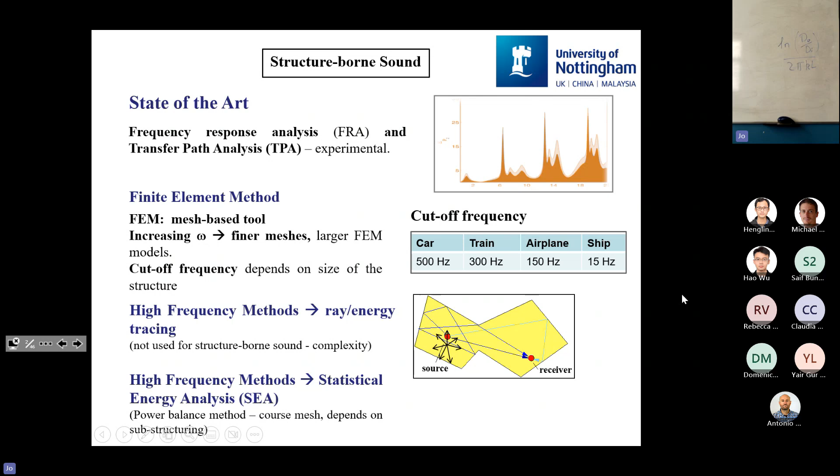So we're talking about structural vibrations, structural excitations, NVH, essentially. So not so much acoustics in this talk. I know, of course, this is the mecca of acoustics, but it's obviously related. You all know that one way of looking at structures experimentally, you essentially excite them. You do frequency response analysis. You get certain peaks giving you modes. You may do something like transfer path analysis, and then that gives you a way of looking at the structure.

From the modeling side, the standard tool is, of course, the finite element method when you look at structures. So you have meshes, but I'm sure you're aware of that as well. With frequency, essentially, you have to go to finer meshes, and at some point, you have a limitation that the meshes just become too fine, and that's actually surprisingly low. I mean, I guess maybe 500 hertz for a car is this critical frequency where the models are just becoming too big. Okay, I guess we'll push that higher now.

But as the structure itself increases, this critical frequency decreases. So if you're looking at ships, and I'm thinking of these big tank ships, then this can be as low as 15 hertz.

If you then go to high frequency methods, high frequency meaning above that cutoff frequency for finite elements, the next best method is kind of ray or energy tracing. That is something people do in acoustics a lot, not so much on structures, because think about how you would follow a ray on the structure, which can be quite complicated. Often it's 2D. Sometimes, of course, you have to treat it as 3D.

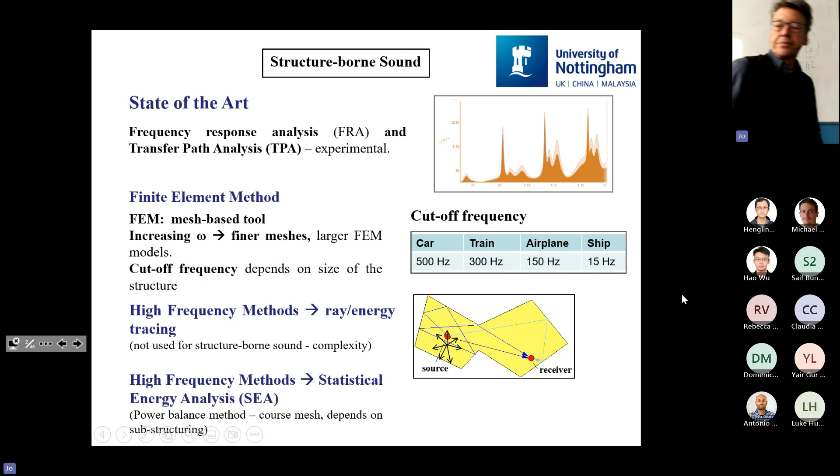Yeah, so here a few words about SEA. As I said, that's kind of the most used method. Most big software companies have an SEA solver in their toolbox. So what you're doing is you may have a structure like that. Here's a car, and then you take the substructure. The windshield could be one substructure, but it's the whole windshield.

The roof could be one. The frame down there, and then maybe various beams. So the substructures are relatively small compared with the degrees of freedom you get from a finite element mesh. So that's normally a couple of hundreds, maybe thousands, but not more than that.

The idea of what you do is essentially you treat all these substructures as a reservoir where this energy is stored and sloshing around, and then there are various exits or entrances where this energy can then flow out, and it only makes sense to talk about these substructures if you assume that you get some sort of equilibrium distribution in each substructure, and then you have some coupling.

So the time it takes to equilibrate in each subsystem is fairly short compared with the time it takes to move on. So then you can do this kind of power balance method, and then essentially you lose all information about the actual structure, about the geometry. The only thing you need is the volume or the area of that, and you get very simple graph-like structures where you have various coefficients. Beta is this coupling loss factor. It becomes something like that.

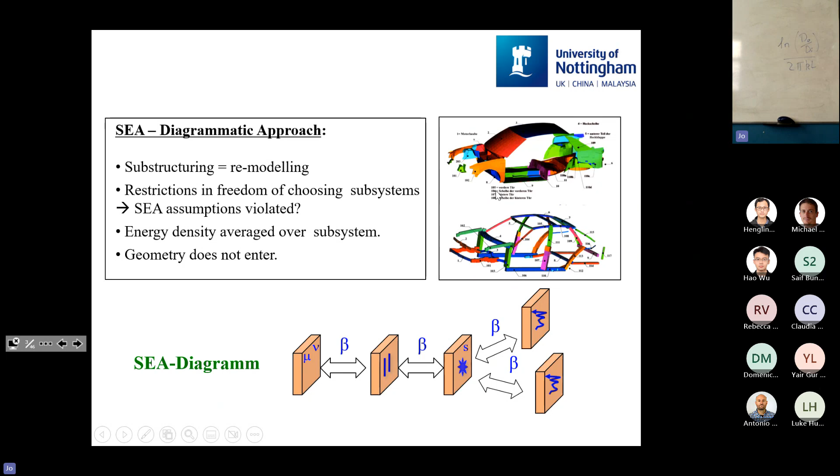Yes. So essentially, here this bottom part, that is then one big substructure which stretches over the whole structure. You get then one energy value for that, and that doesn't really make sense. So anyway, this is used, and it can be used, and there are justifications when it can be used. They're quite nice. If you think of this in terms of rays, which I will do in a minute, what you need is some sort of ray chaos in each of these subsystems, and you can justify the SEA assumptions quite nicely. Which is normally not done. It's kind of trial and error.

Right, so what I want to do is go to ray tracing, and we will try to do ray tracing on structures. Let's just start with the usual way. You have a source here, and you have a receiver point. You have the rays going from the source to the receiver. As a semi-classical physicist, I would write this down in terms of the Green's function, which is essentially the energy or the rays going from this source point to the point R.

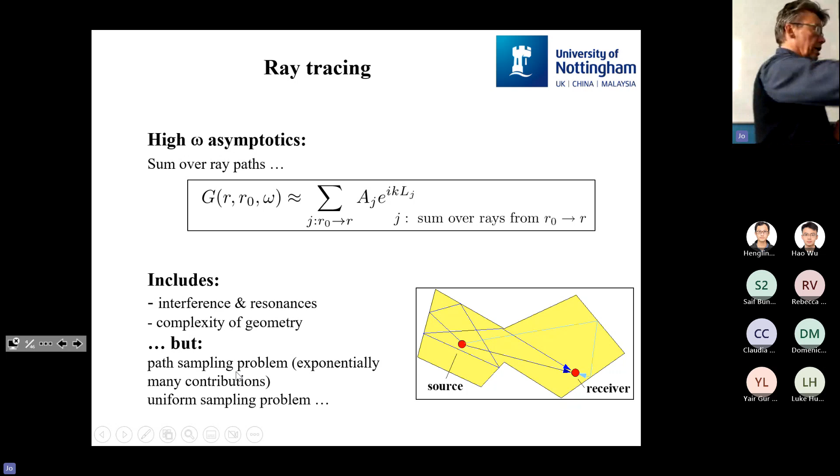Well, again, of course, you have waves traveling in the structure. It's the elastic waves, but the structure itself is much more complex. So, what we do is essentially look at the energy density of our structure. So here we are back to this picture where we have rays going from R0 to R. There can be many of these rays. They all have phases attached to them.

But if you go to the square, you get kind of a double sum over these terms, which you had in this Green's function earlier. And then you can argue that the dominant term in this is when j equals j prime. And then you have as a dominant term essentially something which you can interpret as the energy density. And then, in addition, you have interference terms. Sometimes this is referred to as the diagonal approximation, which is the dominant term.

But here, of course, you have not lost all phase information. So the phase information is in these interference terms. But you could argue that this is sort of an average value, and then you have some fluctuation on top, which are given by these interference terms. So we will try to only model that part here, and forget about the interference.

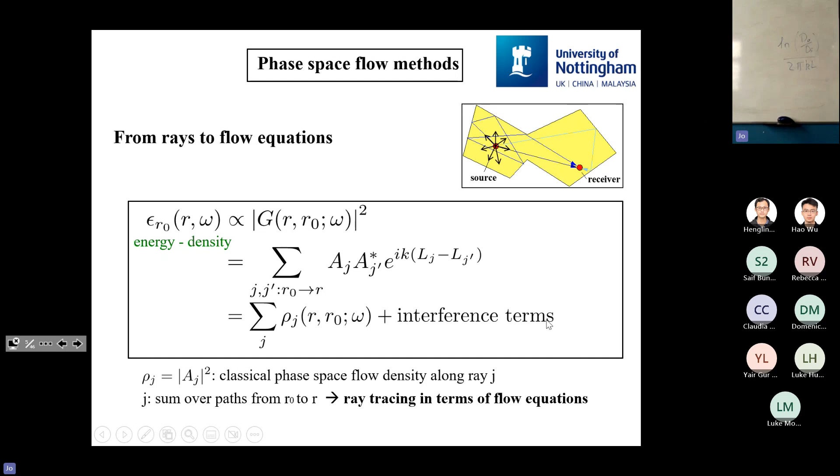By doing so, of course, we lose all information about resonances. We are back to a classical picture of energy flowing in that structure. Yeah? So there is no interference, no diffraction, nothing of that. That's all gone at that point of the approximation. So in the following, I will now look at this energy density, and it may depend on two parameters. R0 would be kind of a source point, and R would be the energy density at some other point, which you get from this kind of ray tracing picture.

And I will argue that what we're actually doing is looking at something else. We're looking at a phase-space density. So instead of looking at this energy density, I'm looking at a quantity which is more involved than that. If I want to classify the rays, I need some directionality. I could say, okay, I take my source and I'm looking at all rays going out from that source and being reflected, and I describe them in terms of a phase-space density.

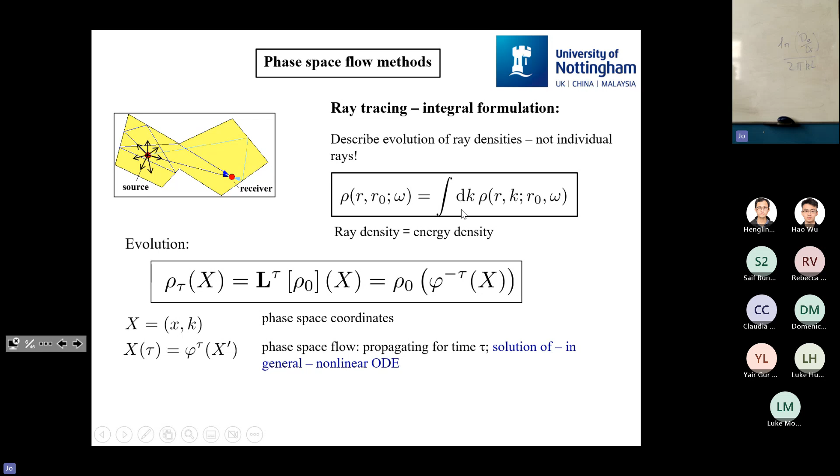Phase-space density meaning the density of rays at a given point going in a certain direction. Yeah? So that's what I call phase space here. I take the directionality as a separate variable, which I'm keeping track of. If you then integrate over this directionality, k, which is reminiscent of the wave number vector and which I call my direction or momentum variable, if I integrate over all directions at a given point, then I'm back to my energy density.

Now, if I have that, I've doubled my variables. I'm looking not at the energy density itself, but at this quantity which also knows about directionality. But the good thing is I can describe this in terms of a linear operator, sometimes called the Liouville flow or the Frobenius-Perron operator, acting on these densities, and that can be written down in a linear form. Essentially, it is kind of a pullback.

So you have your density initially. If you want your density at a later stage, this rho_tau(X) is in my phase-space variable, twice as many variables. So it has the position, it has a momentum. And if I want the density at some later time, I'm essentially pulling back the flow. So here's phi tau, that's my flow. That's telling me that for the ray starting at a given point, going in a certain direction, phi tau tells me where it is a time tau later.

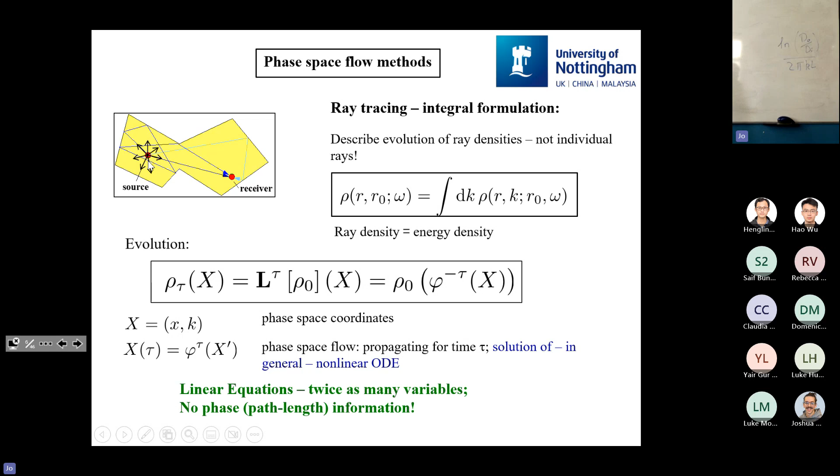So the idea is, I'm doing that slightly differently—I'm actually describing that as a map. And then we very easily come to meshes. Think of this being our system here, but later on it will be a mesh cell of a much larger mesh. Think about, you have this source in the middle.

So what you can do is essentially see how this energy goes to the boundary, and once you know what the energy density is on the boundary, you can map back from boundary to boundary, and you get a boundary map. That will also describe your equilibrium distribution, but the nice thing is you've thrown out time, and you now have a geometric description of that flow in terms of maps from boundary to boundary.

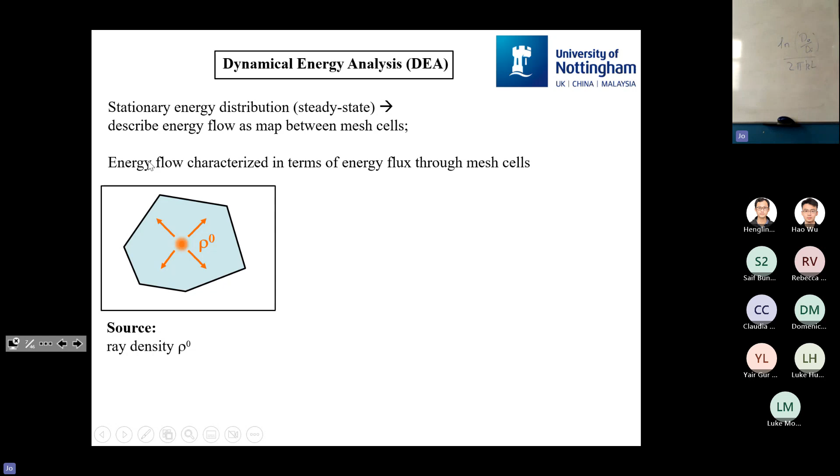So the idea is to describe this internal source as—you could think of this as kind of a light source—and you replace that by what's reflected here by the mirrors at the boundaries. That gives the same thing after you've excluded the direct path.

And then once I have this source on the boundary, what I'm doing now is just mapping my source on the boundary back to the other boundaries. I describe this as a boundary map. So the boundary map is now, instead of this continuous flow, I'm just looking at something which maps my coordinates S and PS, being the direction tangential to the boundary.

I map that to where it sort of ends up after one reflection. And now I can use that map to map my phase-space density, but now it's a phase-space density in a kind of surface section plot, or some reduced plot that got rid of time and also got rid of one of the variables. So that's sort of what we're doing.

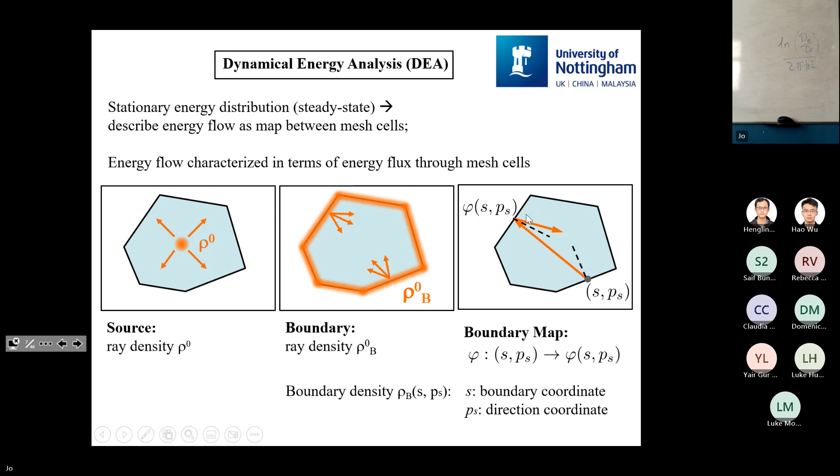Now, instead of having only one of these regions, I can add another cell here and another cell. Again, I start with boundary density, and from then on, if it's just going through, I can map that to the boundary of the next cell, the boundary of the next cell, and so on. So that's now an implementation—that's all I want to say about the method.

That's now an implementation. I'm not sure whether you can see that—there's a mesh in this purple region, and there's a source coming from one of the boundaries. It's quite a directed source. I can choose my source wherever—think of that as an excitation, like somebody banged on the structure, and this thing is now propagating.

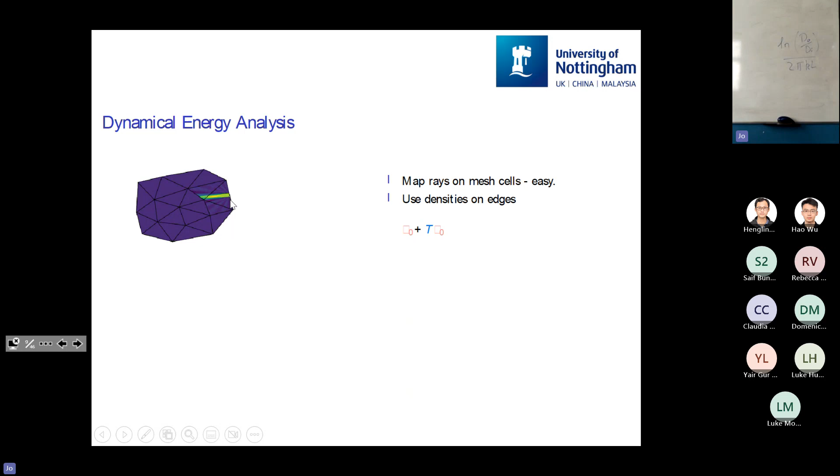Oh right, that happens when you copy. So this red square is actually rho—rho naught, standing for my initial excitation or initial energy density. T is now my operator, which maps these density functions from one boundary to the next. Now you see what's happening here—you're propagating this slowly through the structure. You have some numerical diffusion here. Oops, sorry.

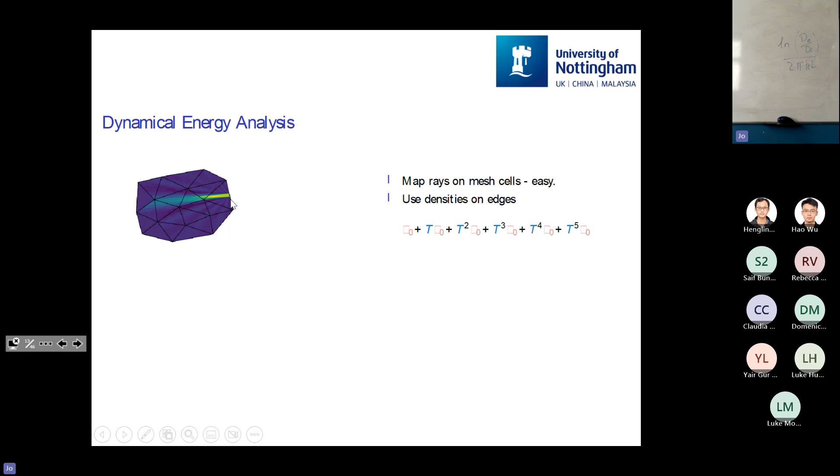When we actually construct a map, we only have a finite resolution. You get infinite resolution only if you have an infinitely large map, because it's an operator. But for finite resolution, you have a certain dispersion here.

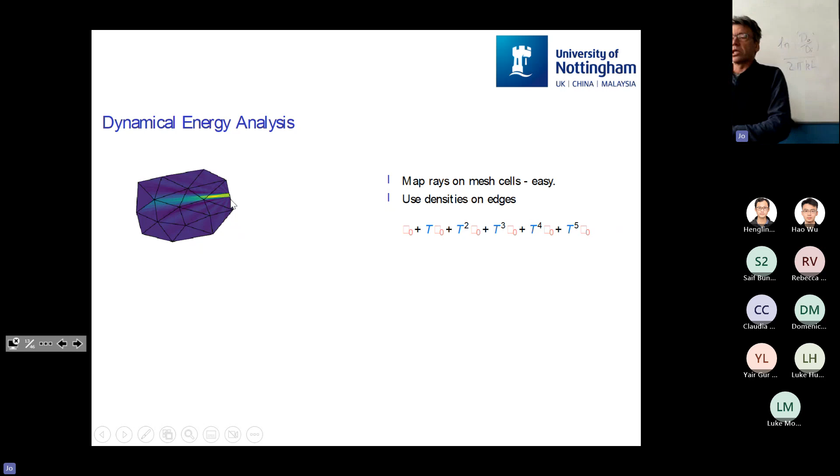T is a matrix, it's a linear operator, and of course, in any approximation we choose, it's just a matrix. So here's the kind of equation we solve.

So think of a rectangle thing rho. If you now want to include all the reflections, you just propagate this further and further, and eventually you get reflections in and so on. If you now take the number of iterations of your operator acting on your initial density to infinity, you get some equation like that. So you have a simple equation that the equilibrium density you're looking for is essentially given by 1 minus T inverse your initial density. So we can do that on a mesh.

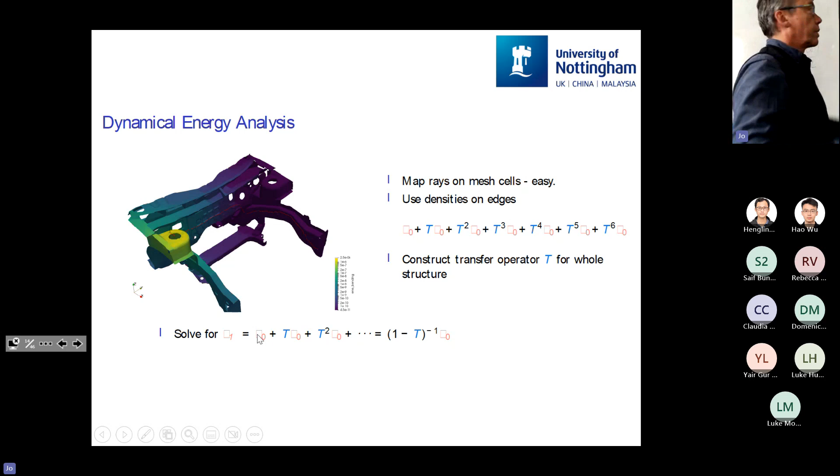We need to define some sort of basis functions, or some way of describing the function on each of these boundaries. But there are various ways that we can think about that.

Here's another example, a part of a car. I think that's where the wheels are and various things. The excitation was assumed to be here. You don't see the mesh itself, but there is an underlying mesh.

We usually use just the finite element meshes we get from people who are interested in that. We're quite good now at rewriting finite element meshes into the kind of meshes we need. They're slightly different, and then here we have some damping in.

That's why it's sort of going down. You see how this energy density is moving through the structure, and you get more or less what you expect: the further away you are from the source, the less intensity you have. But there are various details you might not guess, because a lot of energy is just going up into this upper part.

Now you might ask, okay, how big is the problem? The problem is as big as the mesh. So for every mesh cell, if it's triangles, we have three sides, so it's 3 times the number of mesh cells, because each side is treated as sort of where our boundary densities are defined. And then you also need to resolve the directionality of your rays.

So you have to multiply this by the number of basis functions you want to use to resolve your directionality. Typically 10 basis functions is good enough for that. So you get about 30 times the number of mesh cells you need to set up this T matrix. These are big matrices, but they don't scale with the frequency.

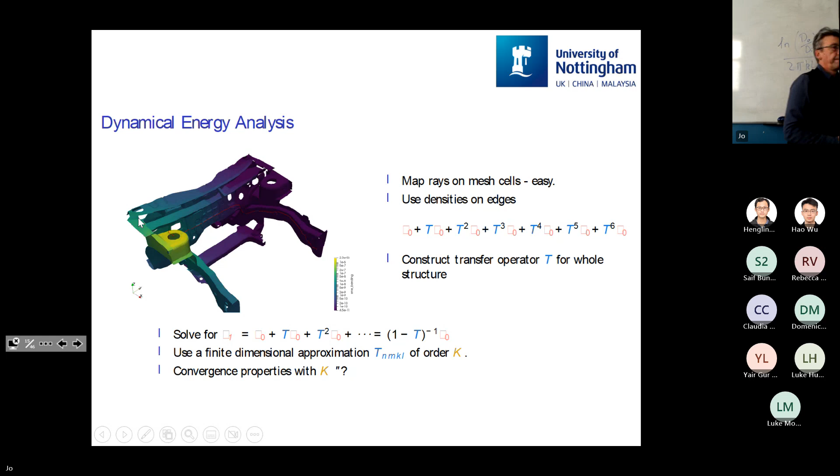Now, lots of nice pictures, and these are the equations already. They're copies, but these are just definitions. So what I told you is, if I want the energy density, I get the phase-space density.

So I can tell you at every point how many rays are coming into that point, in which direction they're going, and I interpret this as energy fluxes. As I told you, most of the time you're only interested in the energy density, which is something like the mean amplitude of your excitation.

That gives you some idea how big the amplitude is at that place. Then you integrate out the direction variable, so you're only interested in how many rays come in, but not in which direction they're going or where they're coming from. That gives you the energy density, and that's typically this color scale I'm showing there.

But we can also do something, we have more information. If you only look at the energy density, you're throwing out a lot of information you have, since all the directionality is gone now. But what we can also do is compute the mean intensity.

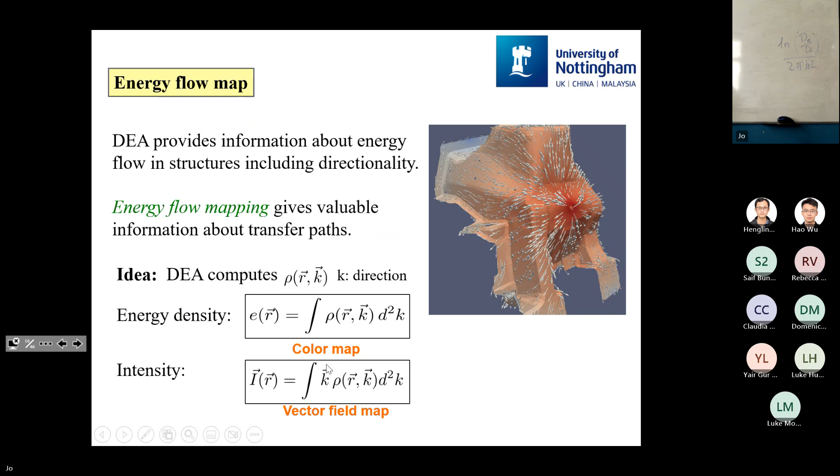Maybe I should speed up because I want to go to the turbulent boundary layer. What I briefly alluded to is, let's assume you have a structure like that, again given to us. It's a kind of plate, and then there are all these other plates in between.

They can be quite large. It comes from these double walls from ship tankers. In this case, you have interfaces between plates, one plate here, the other plate here.

And what happens there is there's reflection and transmission, but there's also mode conversion, so you can actually mode convert from a flexural mode into a longitudinal shear mode. So what you can have at these interfaces is indicated here. Let's assume you have a flexural mode being excited, but whenever this ray hits the boundary, it can now be mode converted, and it can also be scattered in various directions.

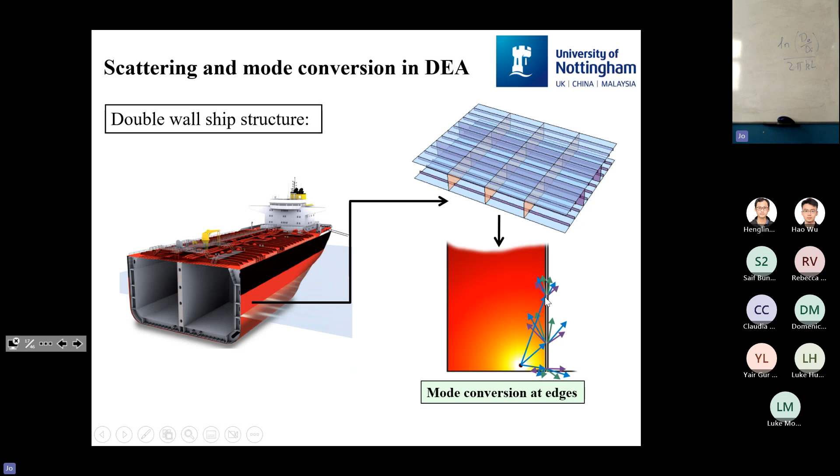Okay, we take that into account, so that's included in the software. You get the pictures like that. So that would be bending, or maybe we start with this picture here. So a bending wave is coming in, and then there are the various other wave types which are now transmitted or reflected from this plate 1. And here you have an example how this can look like.

So as a function of the incoming angle of the bending mode, you get all these different wave types. So this blue line is bending from plate 1 to plate 1. Here you have bending pressure, but you go from plate 1 to plate 2, and so on. What we have implemented there is essentially a simplified version of this paper by Langley and Heron from the 1990s. We make a certain approximation with the line junction approximation, but then you can do that.

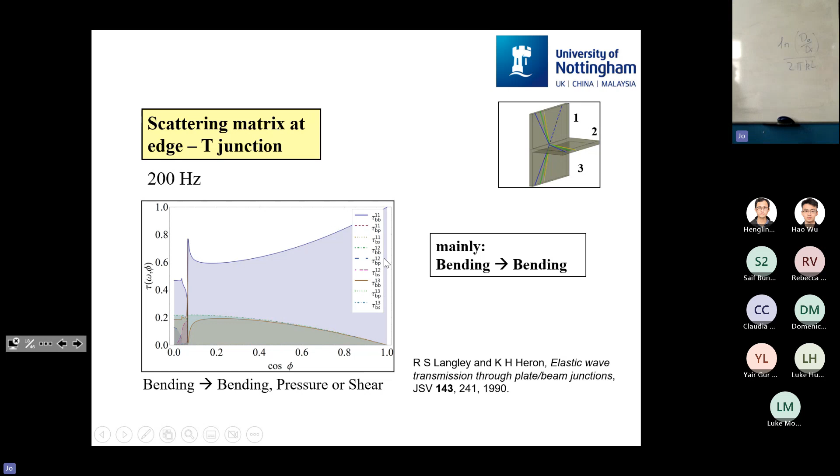Yeah, and it's simple matrices. I mean, in this case, it's a 10 by 10 matrix or 9 by 9 matrix, but you still can compute that. You put that into the software. So whenever your ray now hits a boundary, I'm checking how many junctions are there, and then I give a sort of probability of whether I'm reflected or transmitted or mode converted. And that's sort of an example here with, again, completely finite element meshes.

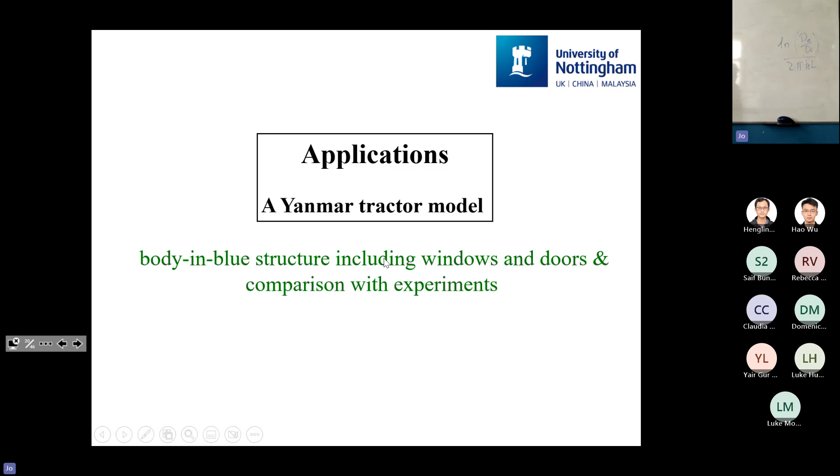All right, I thought I'd show you a couple of things because that was an exciting time. So essentially with Yanmar, they paid us money for validating our method. Of course, they used it then later on. I'll show you an example where they used it. So the application was this Yanmar tractor. So this is the tractor itself. I've seen it. We went there and visited.

This is sort of the front frame. That's where the engine, where the gearboxes would be sitting. And here you have the cabin, with glass and the seat and so on. They wanted us to model the sound pressure level at the driver's ear position, so quite a challenge, but they made it slightly simpler for us because the engine wasn't included. So essentially, it was just this frame here. So it's all metal apart from these windows.

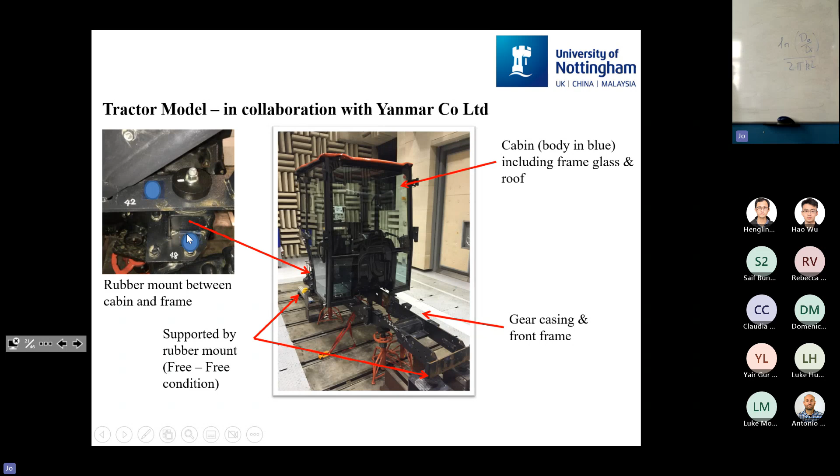So they measured that. So the critical point was here, this mount, where the frame is connected to the cabin. That caused some problems, so that's why I'm pointing this out here. That is, of course, in there to isolate the cabin from the structure. They did various measurements. So they excited it at some point, I think here at the back, and these were accelerometers all over the structure where they did measurements.

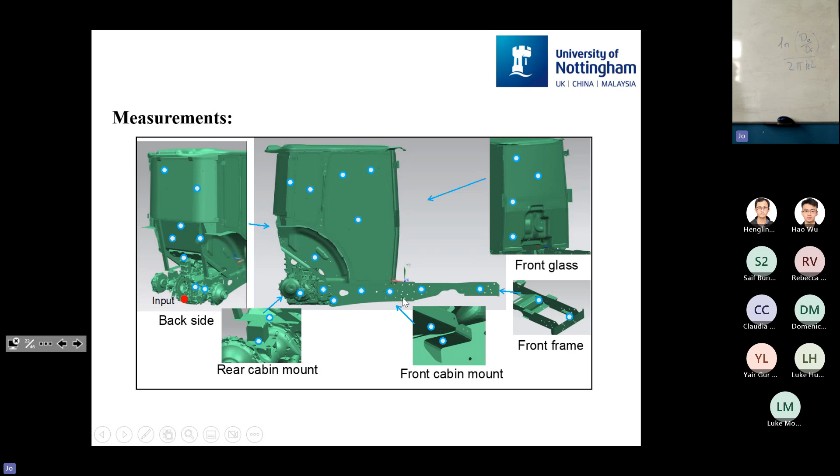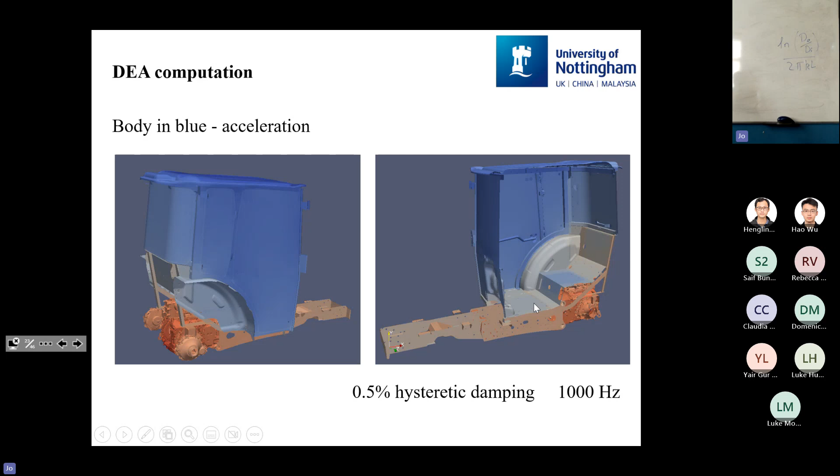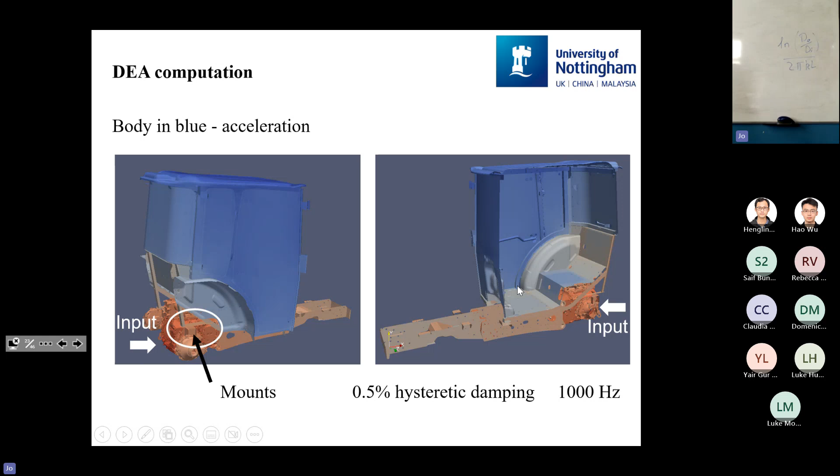They wanted the results before they showed us the measurements, which is always nerve-wracking. But at the end, it wasn't so bad. Our first result was this. So these are various positions where these accelerometers are sitting at a specific frequency, 2000 Hertz, which is quite high. So the first result was this red curve, and they were quite happy about that. So that was a relief. So we got the fact that it's dipping down here. I think that is the frame. This is mostly the cabin.

We noticed that the main problem we're having is that we don't really know what these damper mounts do. So we adjusted that, and we got this black curve where we're taking care of some frequency dependence of this rubber mount as well, and so on and so forth. And it gets to the dirty details. That's always the problem. Your model is only as good as the parameters you get.

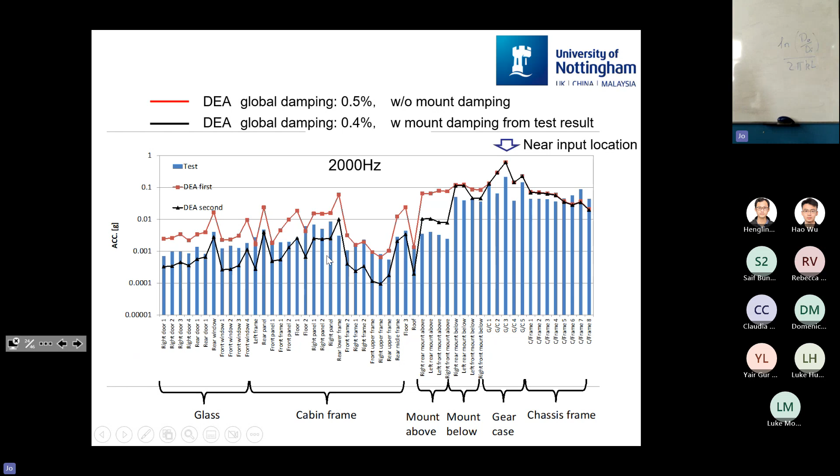So now you can look at where this energy is actually entering the cabin, and then you can start making modifications which hopefully will prevent that. And that's what they did with a different model, and we weren't even involved in that. They did the calculations.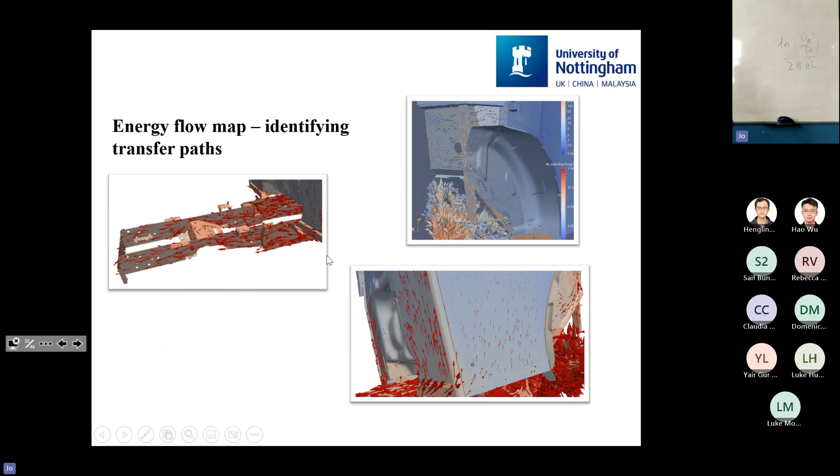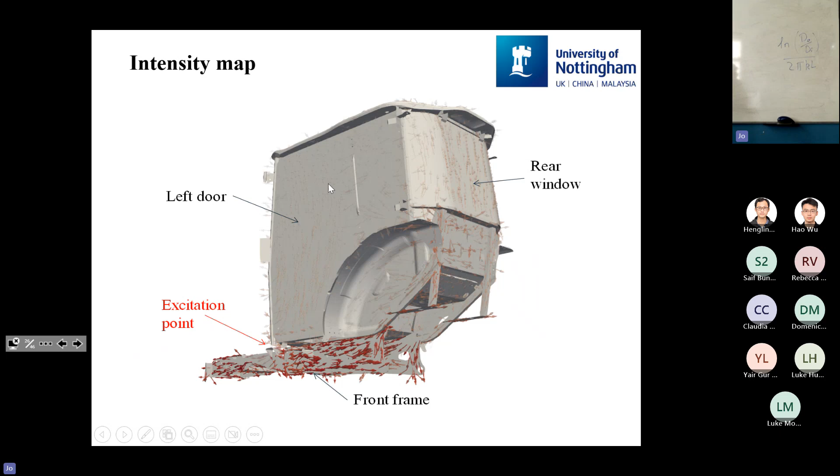That's another picture of this intensity map, just in this case not only the arrows. And as I said, we're most interested in the excitation of the cabin actually. So that's why they did that. They did some more detail. I don't want to go into much detail, but they did this without us. So they have the software, and they wanted to understand.

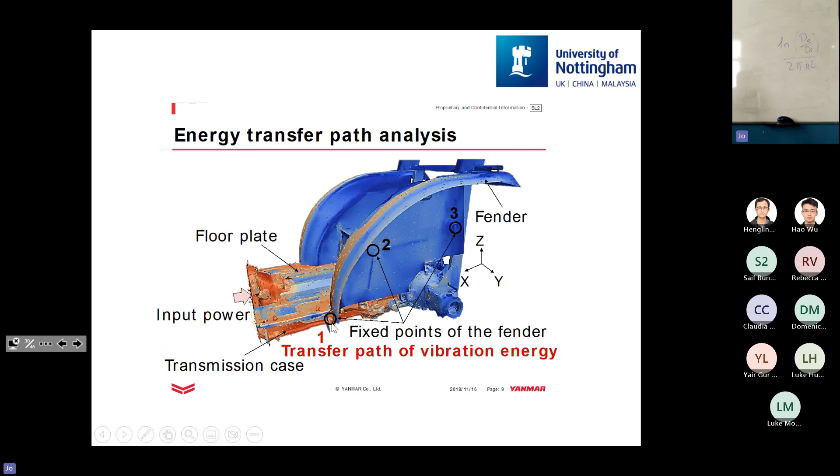They realized that a lot of energy goes over these fenders, so they tried to understand where it's actually entering the fenders. And they did this with our software, and then they identified there's a sort of point where things are actually coming in. Here's sort of more detail of that.

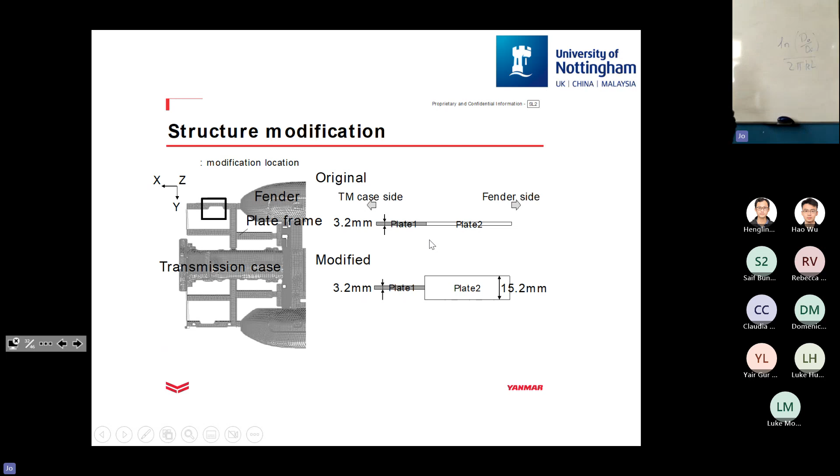Then they decided, okay, maybe if you do an impedance match at that point. So here's sort of one plate and there's a second plate, and that seems where most of the energy is flowing in. If you make one plate thicker than the other, then more will be reflected. So they tried that out again with our software. I'm not sure whether they built it, and they saw a slight improvement here in making this modification.

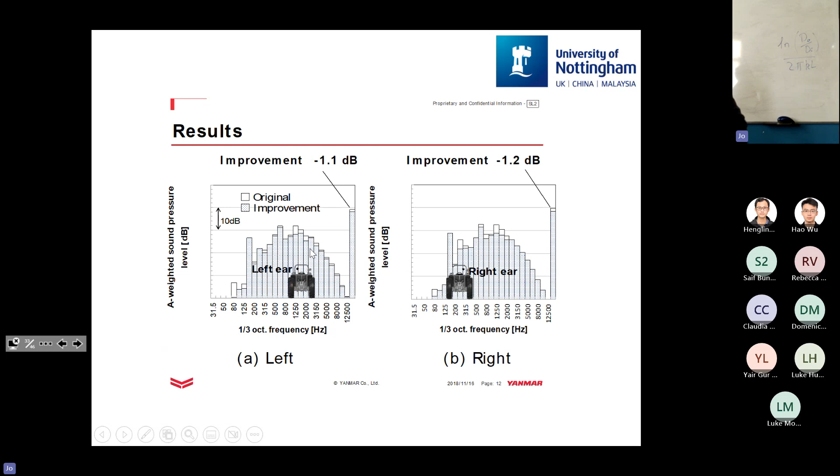So that was nice. As I said, unfortunately, Satoshi Morita has left the company, and so since then it's a bit dormant. That's always the problem with these industry applications. All right. This is sort of my take on DEA. You have questions on that?

So the tricky bit is with these kind of operators, it depends very sensitively on the function spaces you're looking at. So the question we were looking at, we were, for example, using Legendre polynomials to resolve our directionality, and they were sort of questioning whether that's necessary. Maybe you can use piecewise constant. It's as good. So essentially, we have now some insight that probably piecewise constant is the best you can do, and you have then linear convergence in that function space. And you can't get any better than that.

By linear convergence, you mean according to what parameter? In finite element, it's in the size, 1 over the size of the model. You see what I mean? Because when you increase your frequency for a given model, do you also increase the error or not? It's not frequency dependent, the convergence. It's just how good you are resolving your phase space.

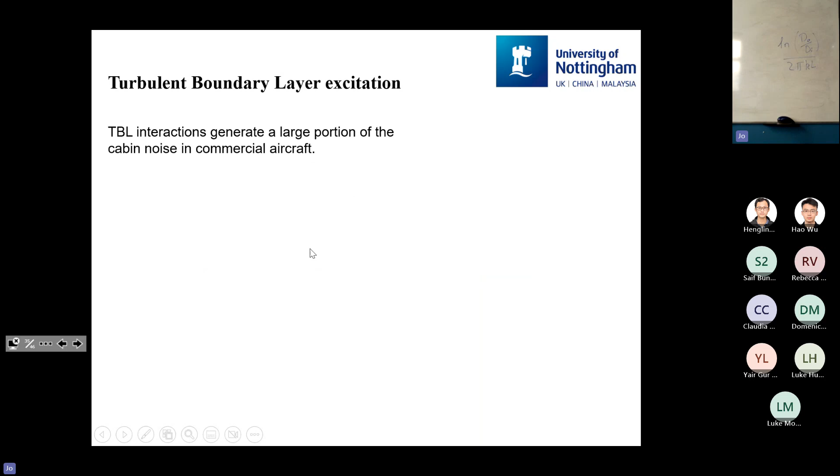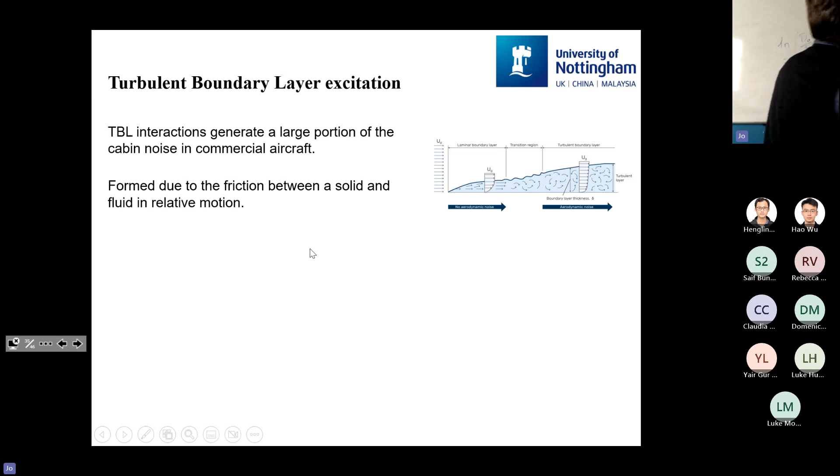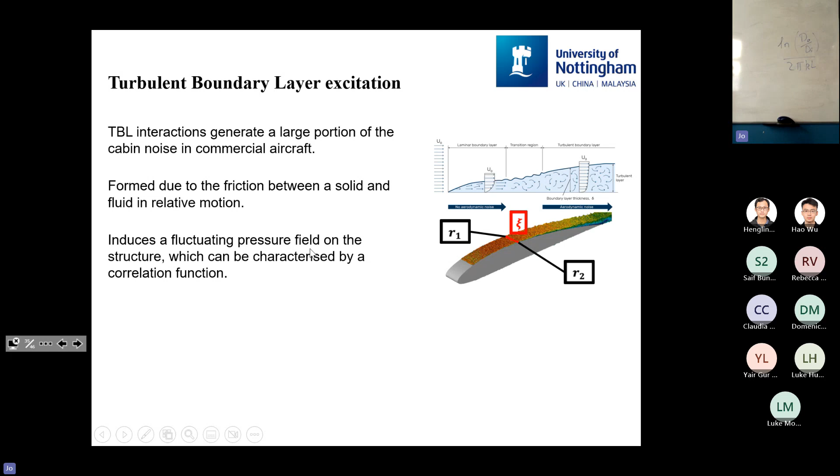So the idea is you have a turbulent boundary layer. A turbulent boundary layer forms as air flows over the structure. It needs some time to build up, of course, but let's assume it's fully formed turbulence. It has typical pressure fluctuations, which are often described in terms of correlation functions. A model which is often used is probably not the best model. We have looked at other models, and that's not too difficult to do.

It's this Corcos model where you assume these are just exponentials, and maybe we should explain that a little bit. So these alpha x and alpha z are some parameters which depend on the structure. Kc is related to the flow speed, how fast the airplane is flying or how fast the air is going over your structure. And this xi x and xi z, these are essentially my length scales. X is along the airflow, and z is perpendicular to that flow.

The y direction would be perpendicular to the structure, which I only need to take into account if I want to describe the thickness of the turbulent boundary layer. But this doesn't appear in this model. So it depends on two parameters, R1, R2, which is encoded in here. Xi x is R1 minus R2 in the x direction, and xi z is R1 minus R2 in the z direction. So a very simple model, maybe naive, but it's a challenge already, and once you understand that, you can do other models as well.

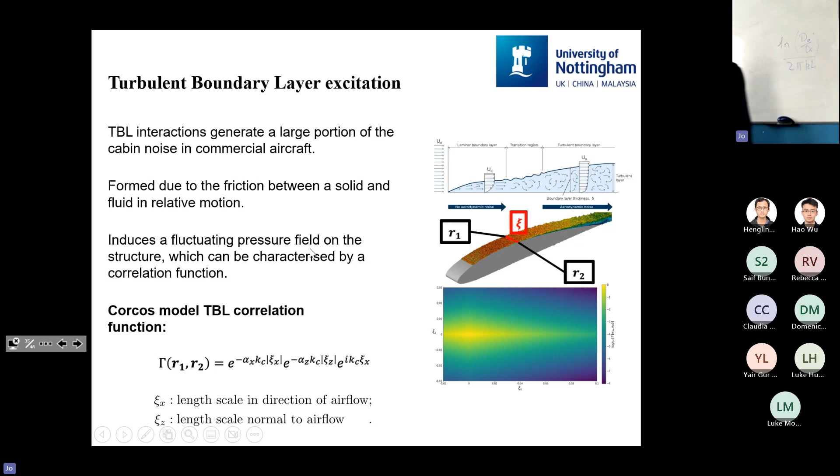All right, let's just put this all up. Okay. So what we want to do is what I just described. You want to now simulate this. You want to simulate the vibrational response. Yeah? You're not interested in the turbulent boundary layer itself. That's given. But now the turbulent boundary layer excites every point, and then what happens with this excitation?

Is that actually moving, or is that just staying there? Is that homogeneous? Is it not homogeneous? That was the question we wanted to look at. So the turbulent boundary layer we assume as homogeneous. The simplest model we can make is sort of just looking at a plate. So there's a turbulent flow across a plate, and there's an experiment quite recently, which looked at this in detail from Marchetto et al. That's the group in Canada.

Typical flow speeds in the experiment are between 19 meters per second up to 40 meters per second. In our simulations, of course, we can go higher. We've done all the way up to 300 meters per second, which is a very fast plane, but you can of course do that. You may have various damping coefficients in the structure now. So we excite the structure. We're very interested in what's happening in the structure, not what's happening with the flow.

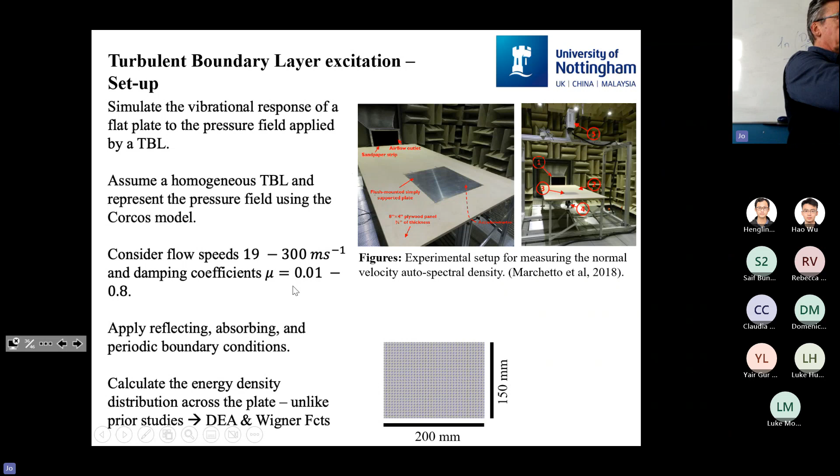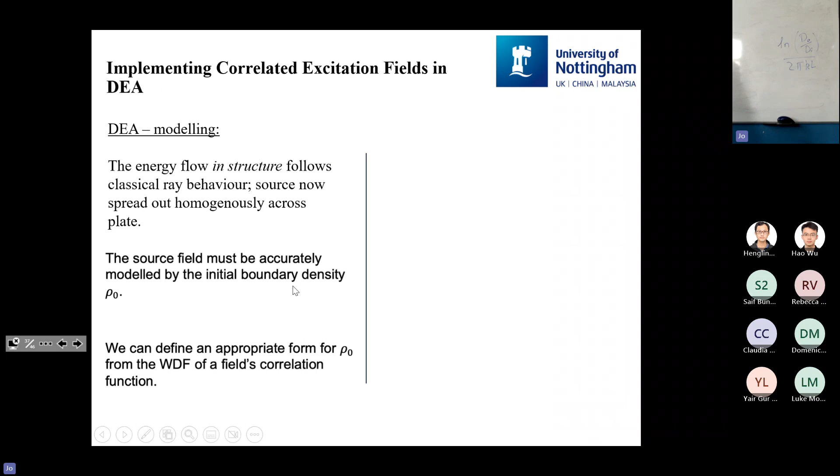How would you do that? So you have only the correlation functions of the excitation. Did I put that here? Sorry, no. The idea how you can do that is: here you have your correlation function, this gamma which I showed earlier. We make a transformation to some sort of mean variable and distance variable, and then we go to something which is called a Wigner transform. It's kind of a half Fourier transform. So you do a Fourier transform only in this distance variable here, but you take it at half point of your function. That is called Wigner functions.

It's very well known in quantum mechanics. That's where it comes from. Wigner was, of course, very involved in that. In quantum mechanics, you have your wave function. You can write this as a density operator. But if you want to go to the classical limit, you want to get to something where you have position and momentum. So that's essentially a transformation from your density operator to a function which now depends on R and P. So that is now a function which is defined in phase space.

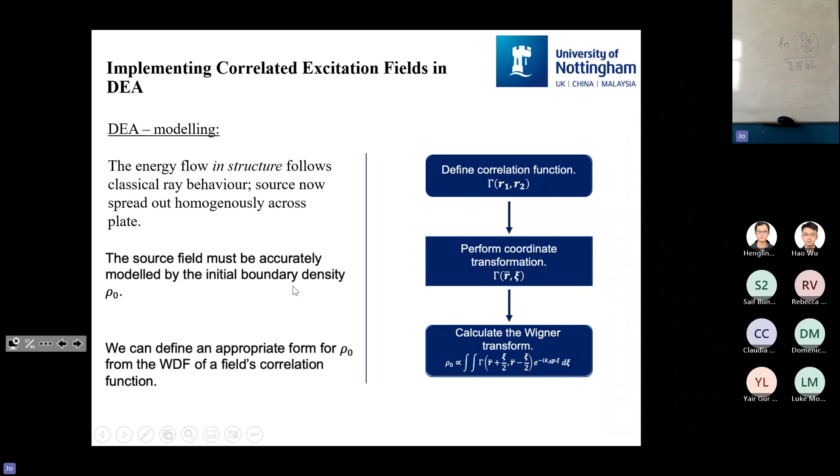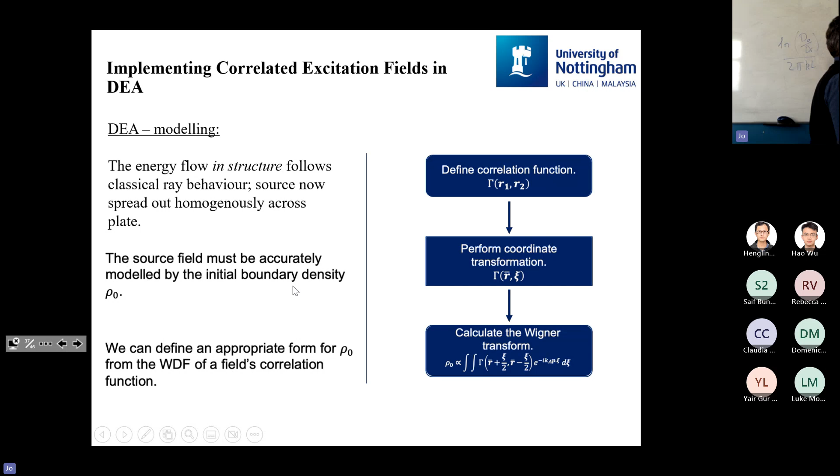And it turns out that makes absolute sense if you have a correlation function. The source of our ray excitation is the Wigner transform of that correlation function. So we take this correlation function, which is given, it could be any correlation function, we make this transform, and then we do the Wigner transform of that, and it has this kind of Lorentzian type shape. The interesting thing is that the Wigner function itself is not uniform. So it's not like lots of point sources where at every point it goes out in all directions. It has preferred directions. The Wigner function tells us that the energy flow in the structure has a preferred direction, which is along the flow.

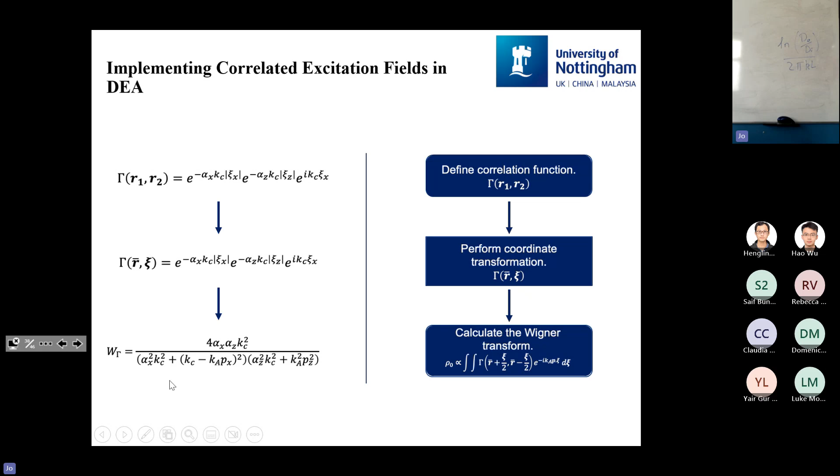So this is plotted here. So now we have here our structure again. This will be our DEA calculation. But the source we're inputting at every point has a preferred direction to go along the flow. This is the airflow. So that's telling you how much energy density is flowing in that particular direction. Yeah? And you see that it goes with the flow. It depends also on the speed. So the faster you go, the more your energy wants to flow in the structure. We're not talking about the airflow. We're talking about the structural vibration having a preference to actually move with the flow. I'm not sure whether anybody has considered that.

Of course, if you put that into our DEA, what you see is that even though all parts of the plate are excited in the same way, once it's excited, it likes to go with the flow. So you must have more excitation at the rear end of the wing than at the, what's it called? Leading edge, trailing edge, exactly. So you must have more excitation at the trailing edge, and the vibrations must be larger there than at the leading edge.

Just assuming that picture, here we implemented that. Here it's just implemented for one cell. We assume that the turbulent boundary layer only excites that cell, just to see what's happening. And you see exactly that. Essentially the cell is uniformly excited, but the energy flows predominantly in the direction of the flow in that structure. So let's assume we can only excite one cell with the turbulent boundary layer. What you see is there's a preferred direction.

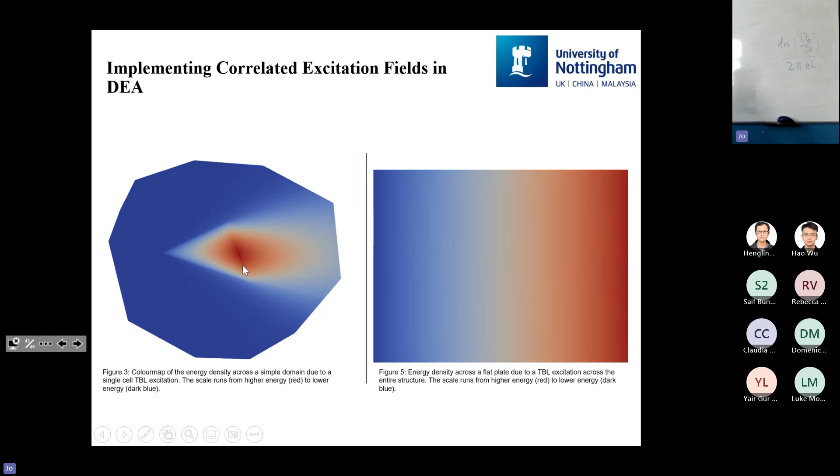Try to do this for a plate, and indeed you see exactly the same thing. You have an excitation of the plate, but there's no color scale. I'll show you some examples later. But essentially, again, on the leading edge of the plate there's less energy than at the trailing edge. This is for different velocities; this is a very low velocity. Oh, sorry, the flow direction has changed now; the flow goes in the other direction. But you see that as you increase the flow speed, this directionality becomes more pronounced.

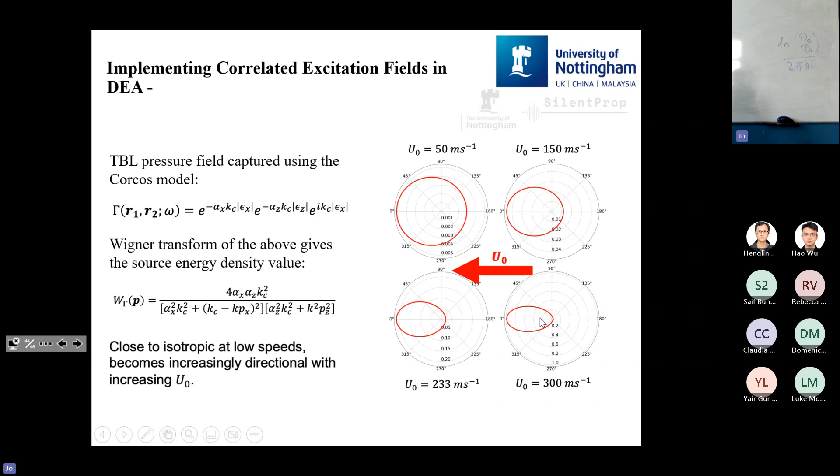That's what we tried to figure out, whether this can be seen. And it depends a bit on the damping. If the wing is highly damped, then a lot gets lost, and the effect is relatively larger. That's what's shown here. Now the flow is going from right to left. You typically get more energy here than here, but the energy difference is not so big. But if you make damping larger, the whole thing goes down, and the relative energy density percentage difference can go up to something like 10, 12%.

So the question is, is that measurable? I don't know. I find it an amusing thing. It doesn't seem anybody has noticed that; it didn't appear in any experiments. But what we're predicting is that a turbulent boundary layer tends to have energy flowing with the flow in the structure. So the excitation at the trailing edge should be larger than at the leading edge. Maybe at certain wave speeds that could be measured. You probably need relatively large damping, and it could be an effect in the 10–20% range, which, given lots of fluctuations on top because you have a statistical model for the excitation, is not clear whether that's measurable. All right, I'll leave it at that.

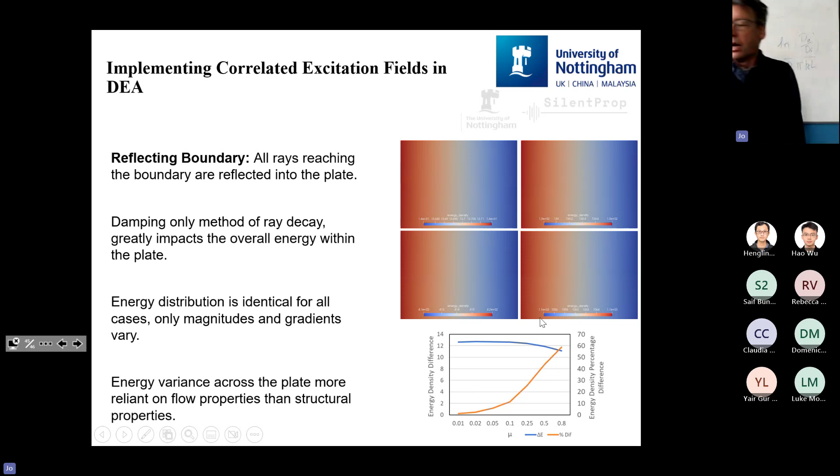What I want you to take away is that here is a mesh-based simulation tool which you can use for modeling vibrational energy density on fairly complex structures. We have validated it, and we have also looked at correlated sources. That's what I showed you. What I haven't shown you is that we also have an implementation for anisotropic materials. The dispersion curve is non-trivial, and you have to think about your ray dynamics. It's no longer isotropic; rays again have a preferred direction. We have looked at sound radiation from plates. Again, we have thrown out phase.

So in DEA we have a little bit of phase information, but we don't have full phase information. If you look at standard theory for radiation of plates, you have something like the Rayleigh integral, which of course needs phase. You couldn't get anything like a critical frequency without phase information. We found a way to get the phase in, and it's sort of the inverse thing: we start with our phase space density and do an inverse Wigner transform, and that gets us a correlation function. So we can use that to predict sound radiation from plates.

And we have a 3D extension built which you could in principle use for acoustic or electromagnetic waves. It's very slow. All right, I'll leave it at that.